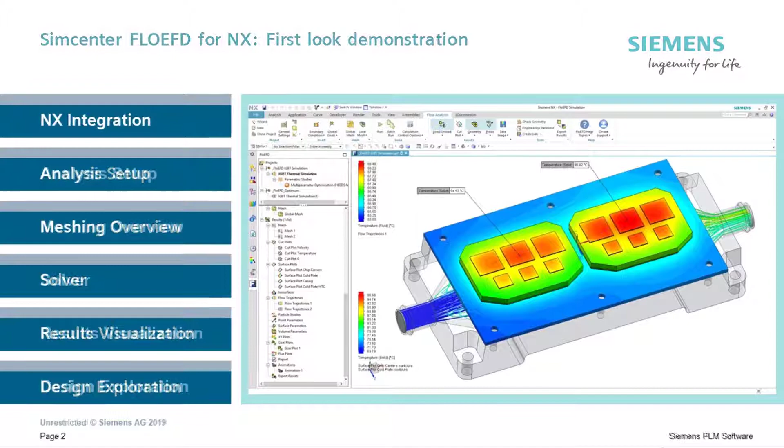By using FLOEFD, we are able to gain important insight into the temperature variation and the flow dynamics of the IGBT module. And we want to see if we can improve the base plate design to achieve better cooling performance. Thus, a new design was introduced.

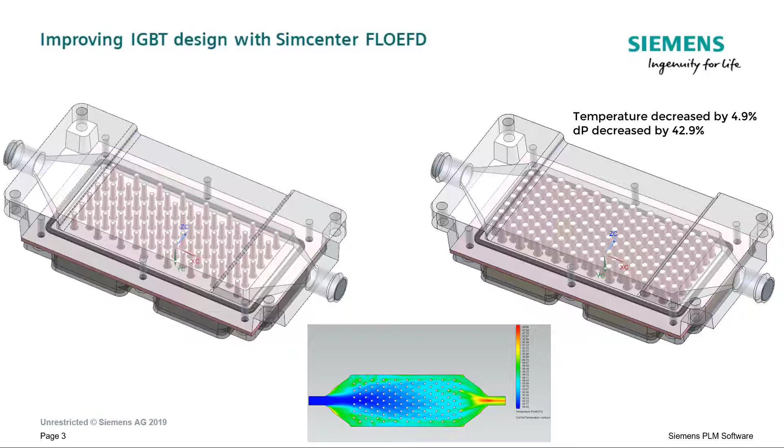Varying the pin size, draft angle, and pin pattern, we are able to get this new base plate design through an intelligent design space exploration to minimize the IGBT temperature as well as the cooler pressure drop across. Let's take a look how we did this in FLOEFD. We have seen how the front-loading, multi-CAD embedded, and easy project setup capability of FLOEFD can greatly benefit designers for CFD analysis.

Directly in the baseline project, we can create a parametric study. As we can see, there are various options available depending on what needs to be achieved. We will choose the multi-parameter optimization, which uses an intelligent algorithm for design space exploration. Here, we can choose to vary the simulation inputs, NX expressions, assembly constraints, or part family parameters.

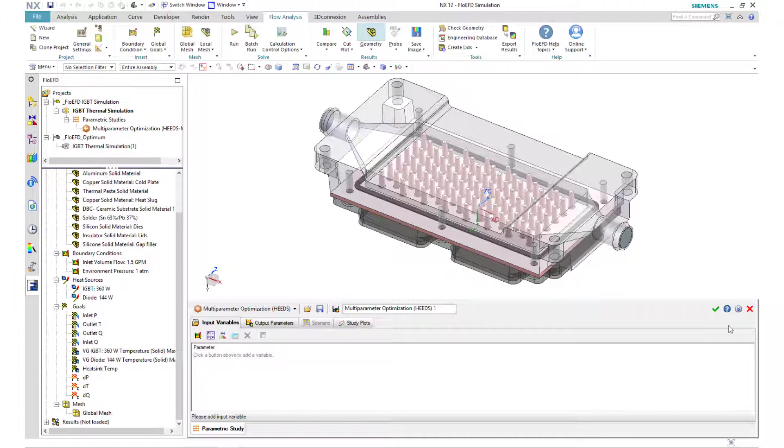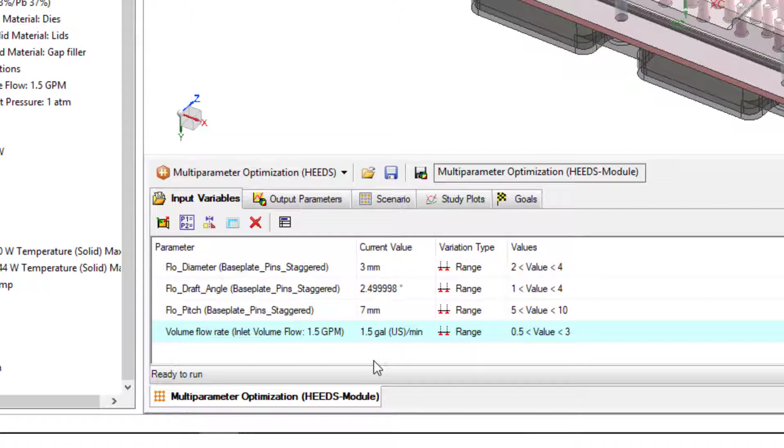Here's a parametric study that has been set up and solved. We saw right at the start how the base plate was designed with expressions controlling some of the features. In the input variable, we selected 4 parameters of interest: the diameter, draft angle, pitch of the heatsink pins, and the volume flow rate of the coolant. We then need to give a min and max range for each of these inputs.

In the output variables, we can select the goals we'd like to optimize on. For this, I'm selecting the maximum IGBT temperature, which we'd like to minimize, and the delta P, which we'd like to also minimize. We can also define some constraints here if there are any engineering guidelines for operation. For example, the cooler cannot have more than a 0.17 psi pressure drop. I can also select other plot goals to compare the visual results.

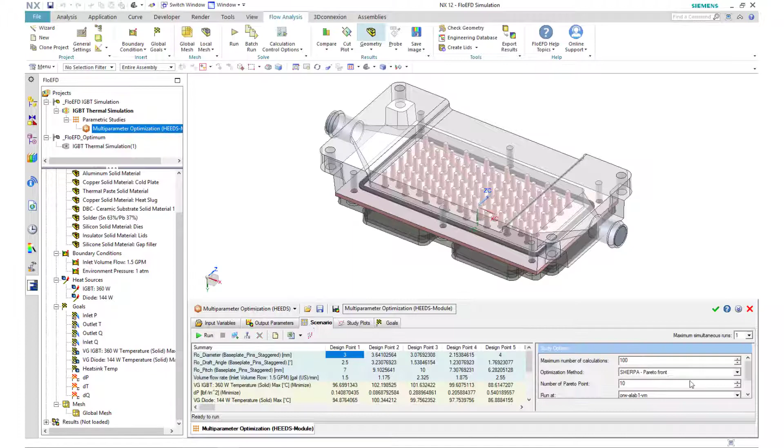Finally, the scenario table allows us to select the optimization algorithm. As the delta P and maximum temperature are opposing goals requiring a compromise, we use the Pareto front to find an acceptable operating point. The software will then run 100 scenarios to calibrate the input variable sensitivity. Upon completion of the 100 runs, we can see the software has identified several optimum scenarios.

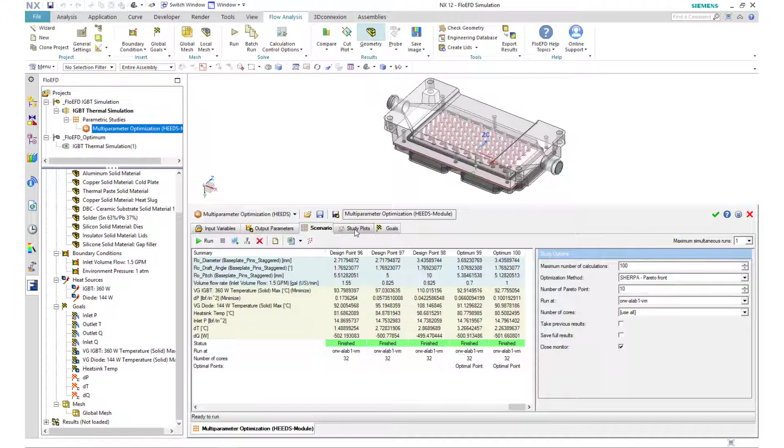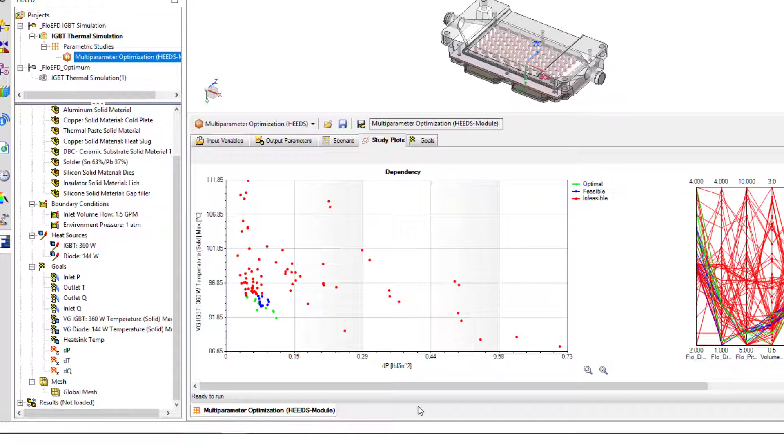From this plot, we can see we have not only one, but several optimum designs that are within both temperature and pressure constraints. We then can pick and choose which is the most cost efficient, so that we have the best out of the best designs.

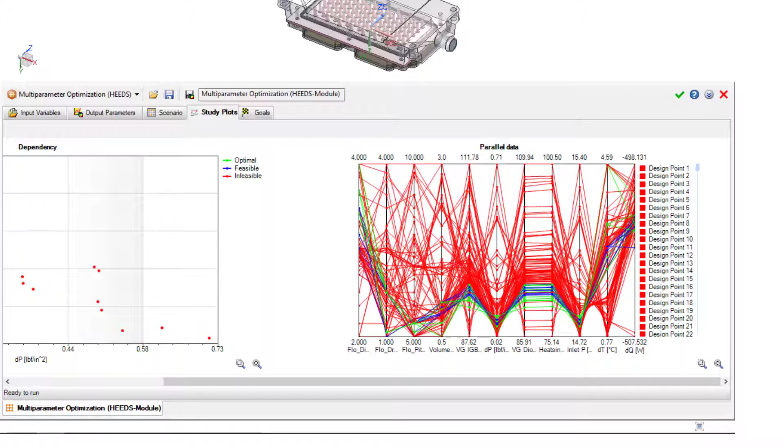On the right, we have the parallel data plot. It plots the 4 input variables as well as the outputs. This is useful to study the trend and see the correlation between variables. For example, we see that the optimum designs can be achieved at 4 mm pin diameter, which is the upper limit of these parameters. This means if we are allowed to set the pin diameter wider, we might be able to find some new feasible or even optimum designs.

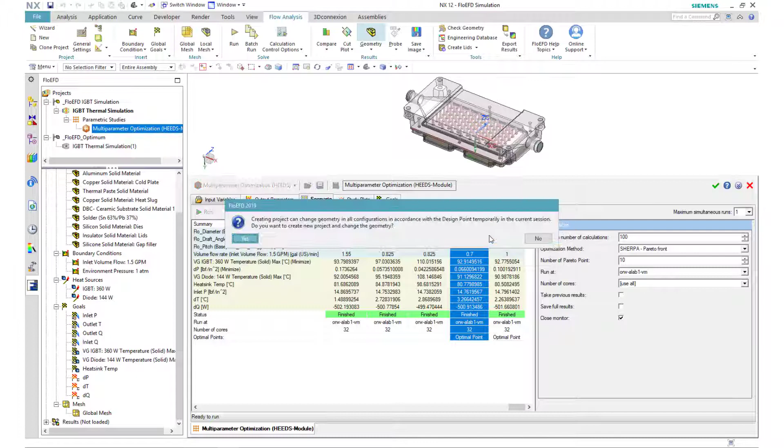Back to the scenario table, we can select scenario 99, which is an optimum. We can right-click and create a FLOEFD project out of this optimum. Jumping over to this design, we can see the pins are much denser and also the pin diameters are wider. Let's compare the results.

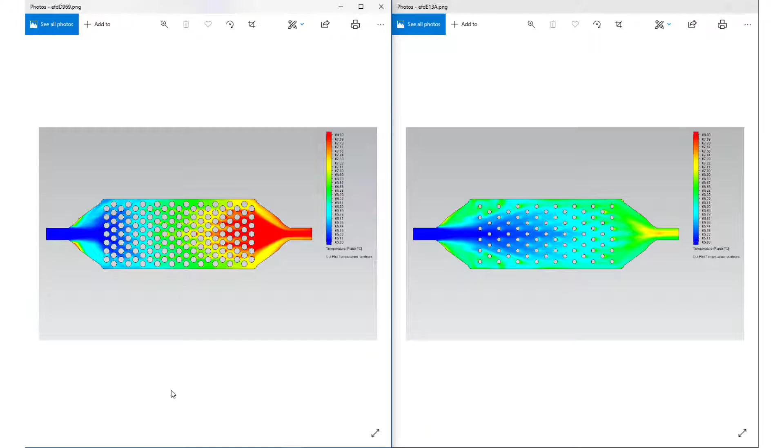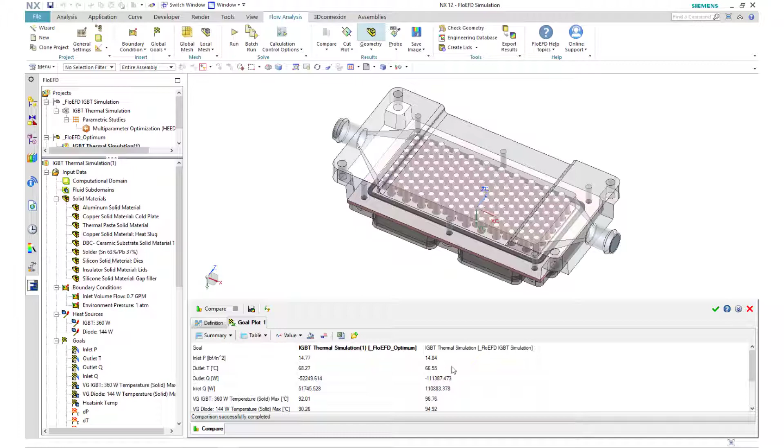We can also use the numerical data to compare the results. From this table, we can see clearly that our maximum temperature drops and the delta P decreases as well. Performing this parametric study, we can obtain not only one, but several optimum designs, allowing the user to take this newfound knowledge to look into the possible trade-off of IGBT maximum temperature and pressure drop of the cooler.